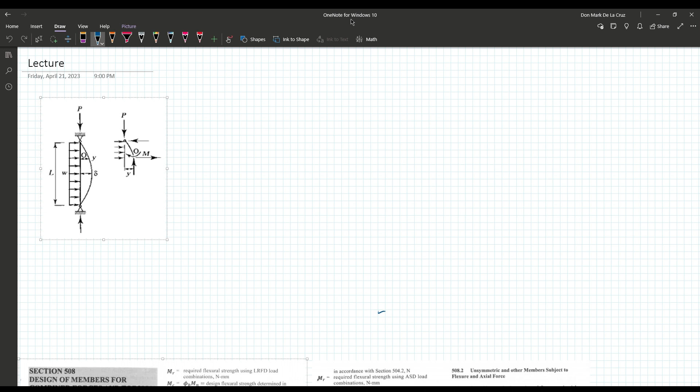In general, the relationship between the required and available strength may be expressed as required strength divided by available strength. So we have RS divided by AS, and this ratio of RS and AS, or the required strength and available strength, should be less than or equal to 1.0 in order to say that our loading is safe.

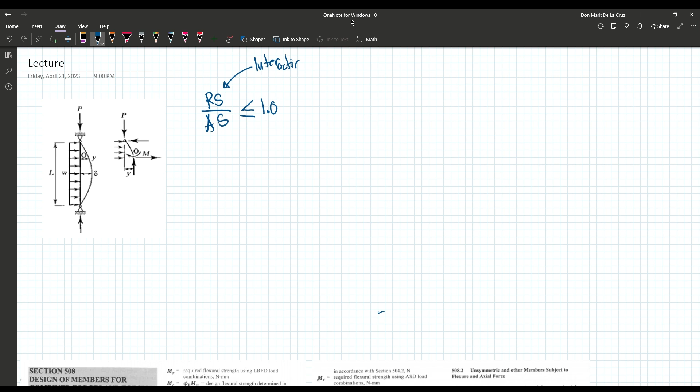And the value or the ratio of RS and AS is called the interaction value. This is called the interaction value, and it should be less than or equal to 1.0 in order to say that the relationship between our required and available strength is acceptable or adequate to support our given loadings.

And considering that we have a compressive force, our compression member will be subjected to a required strength, which is PU, and it also has a capability, our available strength, which is phi PN. This is for LRFD.

And the ratio of the two, PU, which is the required strength, and our phi PN, which is the available strength, must be less than or equal to 1.0. And if we have ASD, our PA divided by PN over omega must be less than or equal to 1.0 in order to say that this is adequate.

Or in general terms, this can be rewritten as the required compressive force divided by our available compressive force, and that should be equal to or less than 1.0. Similarly, if we have a member subjected to bending, we will have MR over MC, which must also be less than or equal to 1.0.

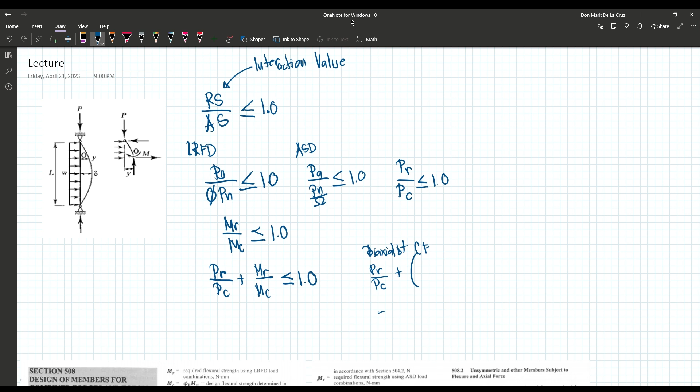And with this, considering that we will have biaxial bending, the moment can be divided into two parts. For biaxial bending plus a compressive force, our equation will become PR over PC plus the sum of MRX over MCX plus MRY over MCY, and this should be less than or equal to 1.0.

The subscript denotes that the bending is about the x-axis for this one, and for this one is about the y-axis. And from this concept, the codes stated in our NSCP were derived or formalized.

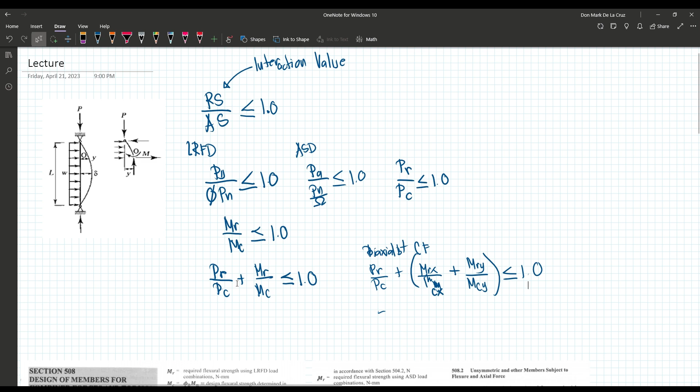Let's go down. Considering that we have doubly and singly symmetric members subjected to axial flexure, the interaction of the flexure and compression in doubly symmetric members and singly symmetric members, for which 0.1 is less than or equal to IYC over IY, which should be less than or equal to 0.9, that are constrained to bend about the geometric axis x and/or y shall be limited by equations 508.1-1A and 508.1-1B.

Where IYC is the moment of inertia about the y-axis referred to as the compression flange, in mm raised to 4. And if we compare this from the concept presented earlier, this is our interaction value formula.

Given that PR over PC is greater than or equal to 0.2, we simply multiply the moment part by 8 over 9, considering that the contribution of the compressive force is larger compared to our moment.

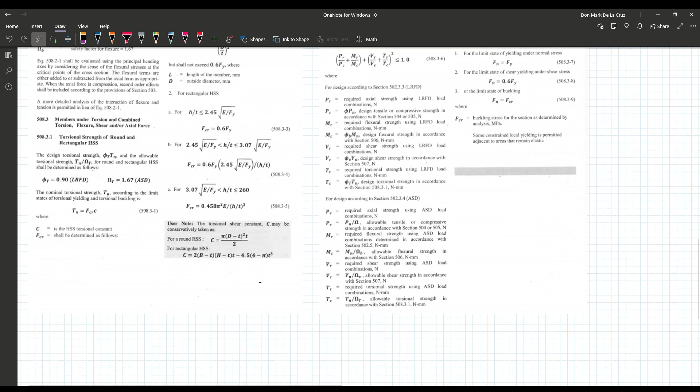We also have provisions for doubly symmetric members in single axis flexure and compression, and for unsymmetric and other members subjected to flexure and axial force. There are also provisions for members under torsion and combined torsion, flexure, shear, and axial force, among others. For now, we'll focus on the combination of flexure and compression.

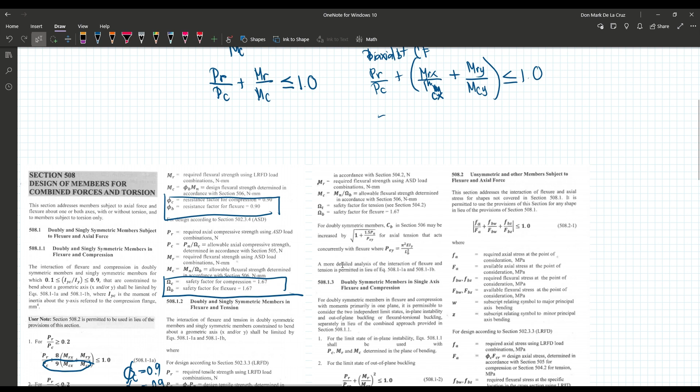And with this, we will have our sample problem in a separate video.

Good day everyone. In this video, we will have our example problem for flexure and axial load, the combination of flexure and axial load. We have a column shown in the figure which is pin connected at both ends and subjected to horizontal and vertical loads.

We are required to determine the adequacy of this member, considering that there is no local instability. Given that the length of the column is 6 meters, our compressive dead load is 150 kN, compressive live load is 420 kN, while our horizontal dead load, which acts at the midpoint of our beam and will cause bending moment, is 30 kN, and horizontal live load is 50 kN.

The steel is made of A992 steel with Fy of 345 MPa and Fu of 448 MPa. Given the section properties of our W250 by 80, its dimensions, and the section properties.

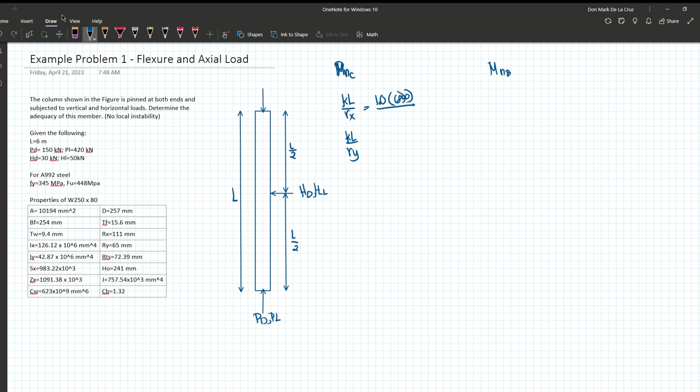We can compute for our slenderness ratio about its x-axis as 54.054. While for our Ry, our K is also 1.0, and L is 6,000 divided by Ry, which is 65. This will give us our slenderness ratio of 92.308.

Comparing these two to determine our critical slenderness ratio, that's the maximum between the two, and our critical slenderness ratio is 92.308. Now, to know what type of buckling will occur, we need to compare the critical slenderness ratio to our limiting slenderness ratio, which is 4.71 times the square root of E over Fy, where E is 200,000 MPa and Fy is 345 as stated in our problem. We can compute our limiting slenderness ratio as 113.40.

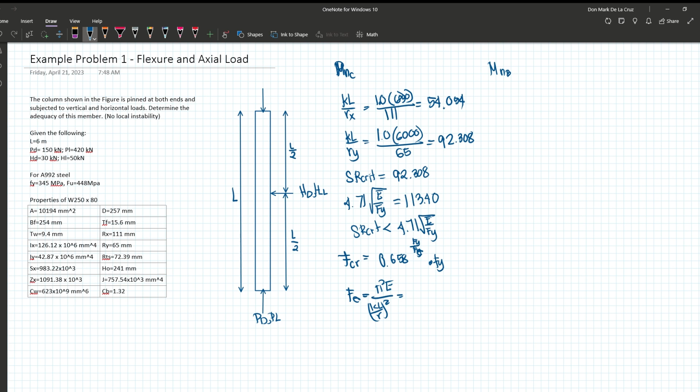Now, the problem is that we don't have a value of Fe yet. So let's compute for Fe, and its formula is pi squared E over KL over R squared, and that's pi squared times 200,000 divided by KL over R, which is 92.308, then squared, and we will get Fe as...

231.66 MPa. Then with this Fe, we can now compute for FCR. So our FCR equals 0.658 times Fy, 345, divided by 231.66, times Fy, 345. And our FCR is 184.97 MPa.

But we're not done yet since we are finding our nominal compressive force, and that's Pn equals FCR times Ag. And our Pn is 1885.6 kilonewton, which we will be using later on.

Now that we're done with the compressive part, let's move to the moment. Since our moment will only act on our major axis, our Mny will automatically be equal to 0, so what we need is just Mnx.

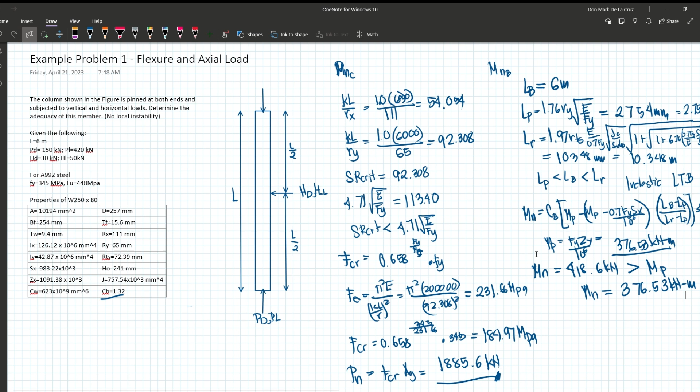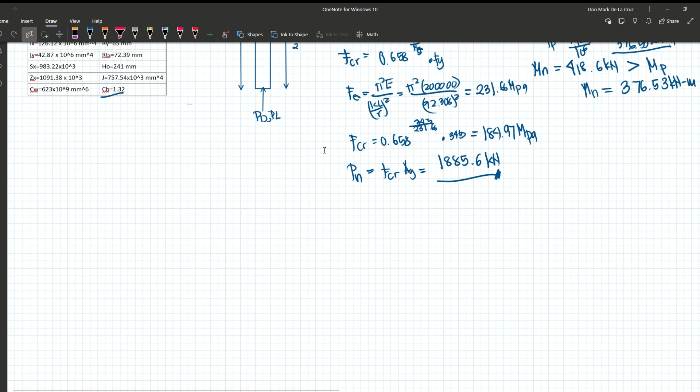Now that we have computed already the value of our MN and MP, or MN and PN rather, we can now determine the adequacy of our beam columns. And to determine the adequacy of our beam columns, we'll be utilizing the provision for our NSCP, specifically this one.

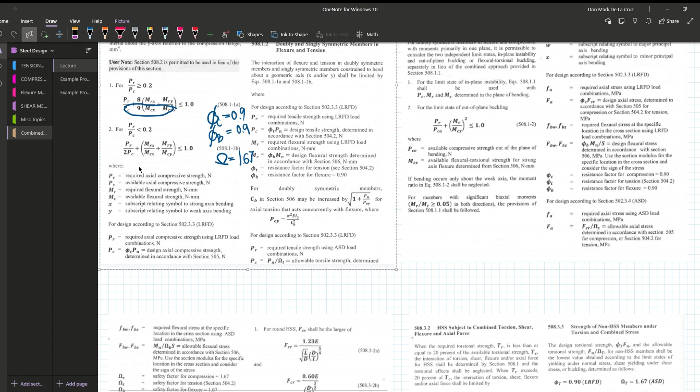We will use this one, and based on this, kailangan muna nating malaman or makuha yung ratio ng PR over PC to choose kung case 1 or case 2 yung gagamitin natin.

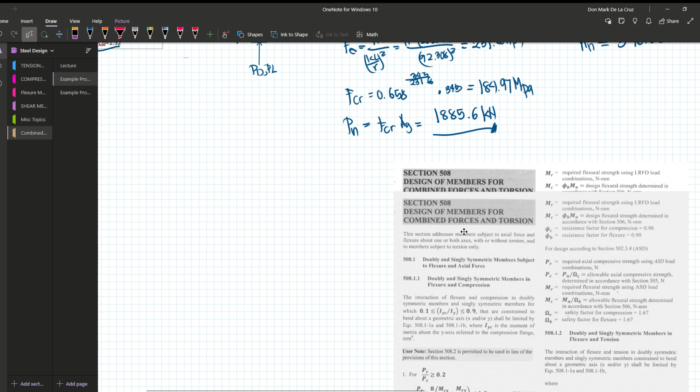Pero hindi pa pala natin nako-compute si ating tawag dito, available strength and si required strength natin. Let's have first using LRFD. Compute natin yung ating

available strength. Bali, meron tayong PC or magiging siyang si PU max equal siya sa Phi times PN, and that's 0.9 times 1885.6 kilonewton, and ang PU max natin ay

1697.04 kilonewton, while our MU max would be MN over times Phi. At ang Phi natin is 0.9 as well times 376.53, and this will give us the value of our MU max as 338.88 kilonewton. But this is just the denominator of our equation.

Kailangan natin pang makuha yung ating mga available, mga required strength. At let's have first sa ating compressive force, that's PU. Ang ating load combination ay 1.2 of dead load plus 1.6 of live load. 1.2, ang dead load natin is 150 plus 1.6 of live load na 420. And this will give us 852 kilonewton.

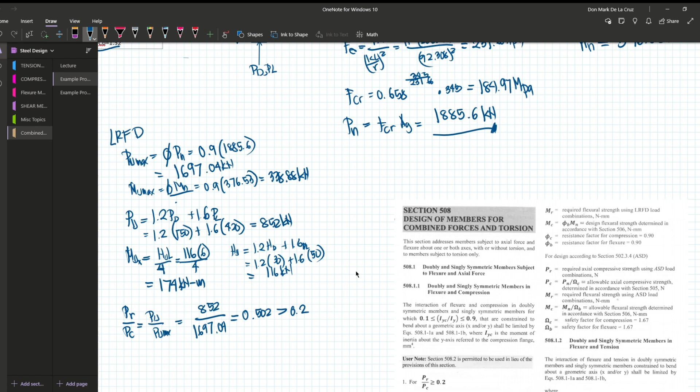And that's why we will use our first case of doubly and singly symmetric members in flexure and compression. And the formula is PR, that will be PU divided by PU max plus 8 over 9 of MUX over MU max X plus MUY over MU max Y, and this interaction value must be

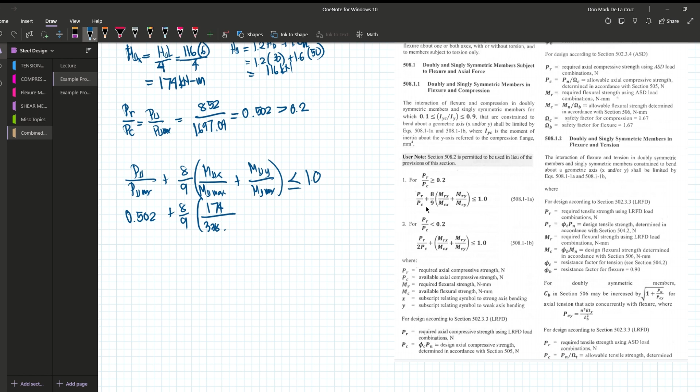less than or equal sa 1.0 in order to say that we have an adequate beam columns. And PU over PU max was already computed. That's 0.502 plus 8 over 9 of MUX. That's 174 divided by MU max, which is 338.88. Ang MUY natin as well as MU max is equal sa 0 since wala tayong force that will cause bending about the y-axis.

And now let's solve for this one. And there should be less than sa 1.0 at ang compute natin ay 0.958, and this interaction value is less than 1.0, therefore yung ating beam column is adequate.

And now let's consider naman si ASD. And for ASD, ang ating omega is equal to 1.67 for both LRFD and for both compression and bending. But let's start in determining PA. That's PD plus PL, or simply 150 plus 420 equal siya sa 570 kilonewton. While yung HA natin ay HD plus HL equal siya sa 30 plus 50, or simply 80 kilonewton.

And with this HA, we will compute for our MAX. And that's HA times L over 4. Bali, apply lang si theory of structure doon, ano? That's 80 times 6 divided by 4. And we will get our MA max as 120

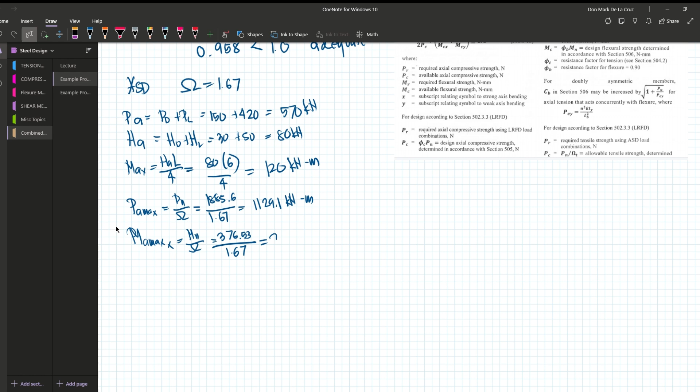225.47 kilonewton meters. And with this, pwede na tayong pumili kung anong case yung gagamitin natin by dividing our PA by PA max. And ang PA natin is 570 at ang PA max natin ay 1129.1. And makukompute natin is 0.505, which is greater than sa 0.2.

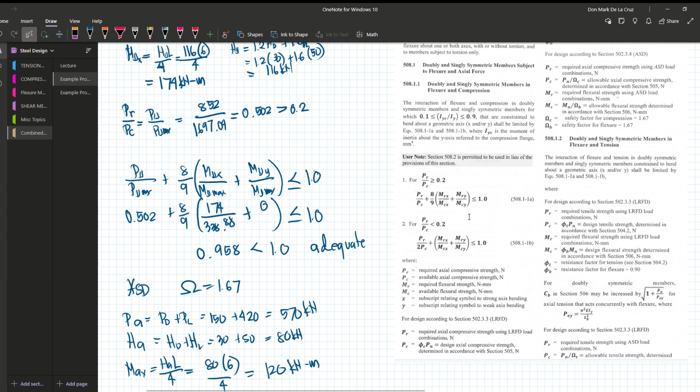So, governing si axial load. Kaya ang ating equation would be this one: PA over PA max plus 8 over 9 times MAX over MA max x plus MAY over MA max y, which should be less than or equal sa 1.0.

Earlier, na-compute na natin si PA over PA max as 0.505. Then i-add na lang natin si moment part. Ang MAX ay 120, ang MA max x ay 225.47. Then ang MAY at MA max Y would be equal sa 0 since there are no forces that will cause bending about y-axis.

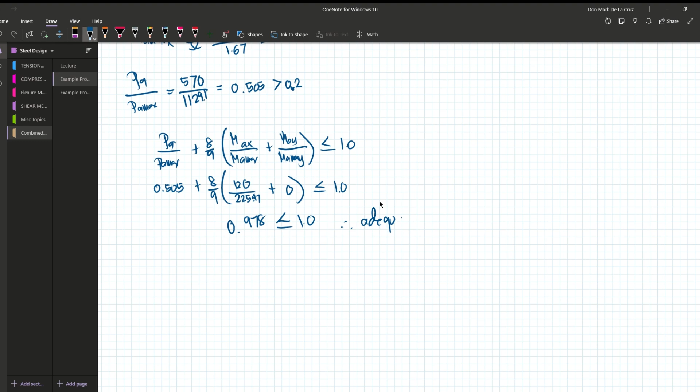Makukompute natin ito at yung ating interaction value as 0.978, which is less than 1.0. So we can conclude that adequate yung ating beam columns to support our given loads.

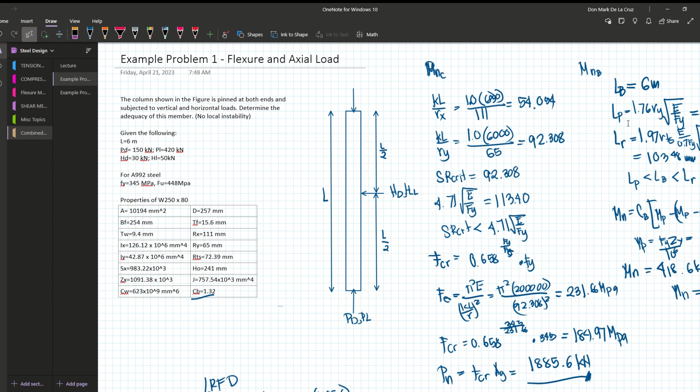And thank you for watching. I hope that you have learned something about our flexure and axial loads. This will be our only example problem for this topic, but we have a sample problem for purlins that is somehow related sa ating concept ng flexure and axial. But for purlins, that is only biaxial bending or biaxial flexure force. Thank you for watching.

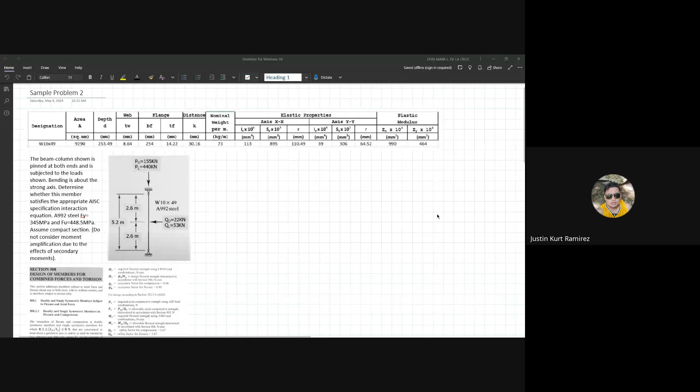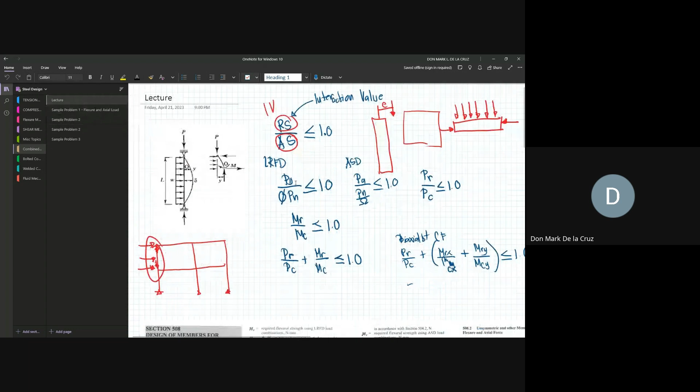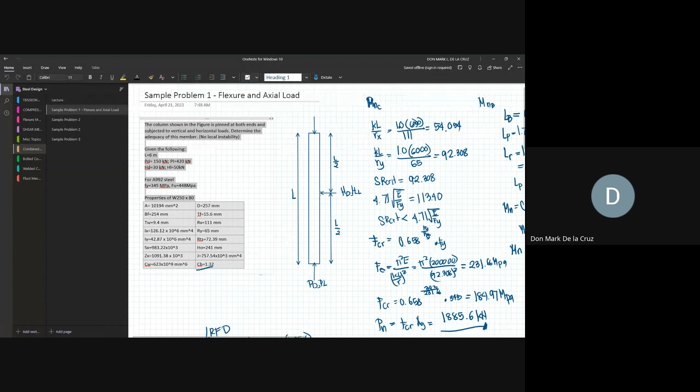For today, what we're going to have is combined forces that may be axial, compression and tension, with the effect of flexure. Bali, ito yung concept na gagamitin natin. Meron tayong recorded lecture na na-discuss na yan sa video, hopefully napanood na to. And we have a sample problem that was posted last time, which pertains to axial compression with an applied concentrated load that acts transverse to our column and has an effect of flexure dito sa column na to.

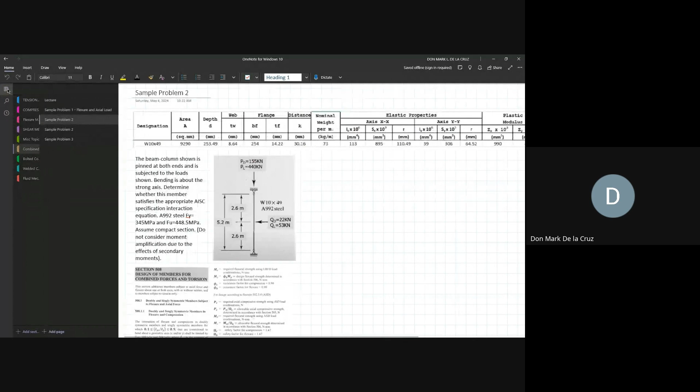And with that, magiging or nag-act yung ating column also as a beam. Meron tayo ditong second sample problem, basically katulad lang din naman siya nung previous sample problem number 1 natin. We'll just discuss this synchronously. Bali, for this one, we have this beam column. Primarily, column siya, pero this will also serve as a beam dahil nga dito sa concentrated load na to. Dahil sa concentrated load na ito, magkakaroon ng flexure o more moment within our column. That's why we have the term called beam column.

Yung beam column natin is pinned at both ends and is subjected to the shown load combination. Meron tayong dead load, then live load na compressive force. And we also have this concentrated dead load and live load that acts at the midspan of our column. Then, bending is about the strong axis. And we know naman na meron tayong strong axis bending and weak axis bending.

But for our problem, yung bending natin will just occur on the strong axis. And usually, the strong axis is yung merong mas mataas na moment of inertia. Considering that this is a W section, yung strong axis niya is the x-axis natin, kasi mas greater yung moment of inertia niya doon. Try lang natin magsulat: greater yung moment of inertia at the x-axis compared to the y-axis. Then dito, kailangan nating ma-determine whether this member satisfies the appropriate AISC specification interaction equation.

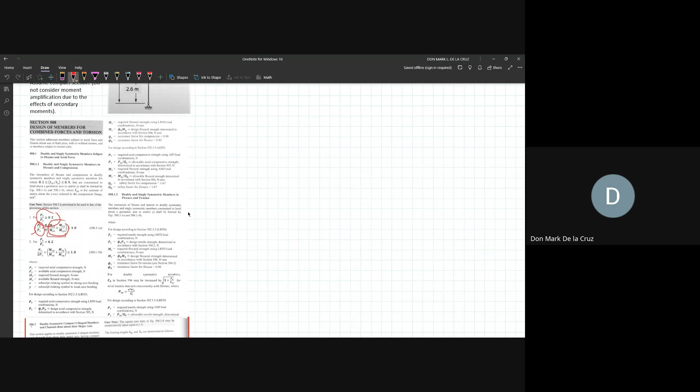So with the given properties shown here, let's start solving this problem. Our goal is just to get this value, whether it is less than 1.0 or greater than that. Let me delete this first.

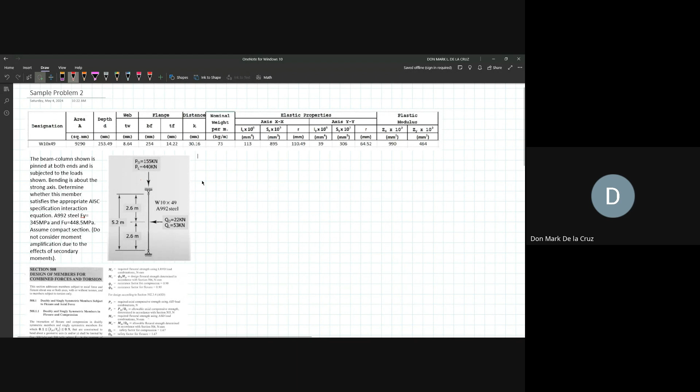So for our first step, what do we need to do first? For the first step, we must compare PR over PC to 0.2. We need to get the relationship of PR over PC to 0.2, because from this we'll know if we're going to use equation 1 or equation 2.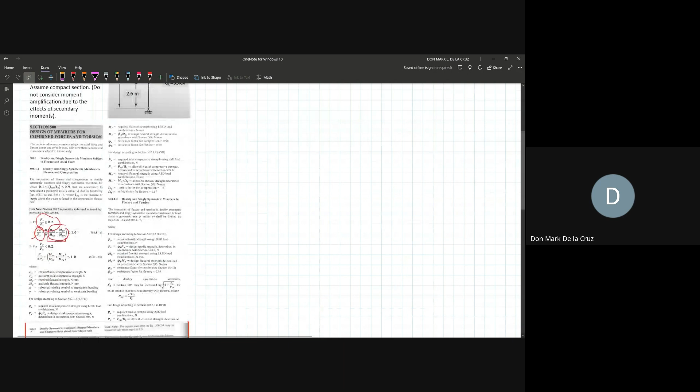So what is PR? Based on the definition here, PR is the required axial compressive force. So how do we compute for the required compressive force? Take note that we have two design philosophies.

To keep our calculation simple, we'll just utilize LRFD. We'll resolve this problem by applying ASD after we finish.

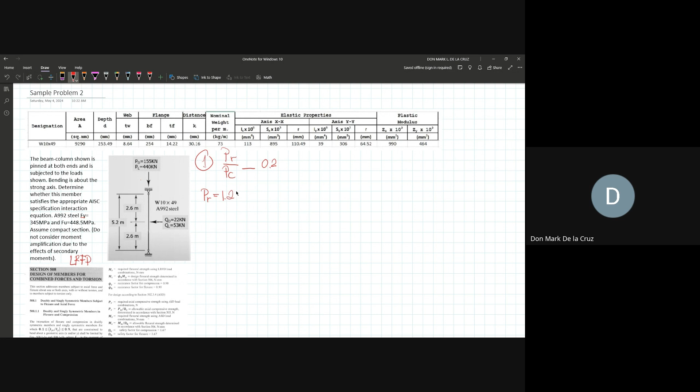So if we're going to use LRFD, to compute for PR we're going to use its load combination factors: 1.2 of dead load plus 1.6 of live load. If it's stated that this is already a factored load, we don't need to apply the 1.2 and 1.6 anymore, but we weren't told if this is factored or unfactored load, so our assumption is that this is unfactored load.

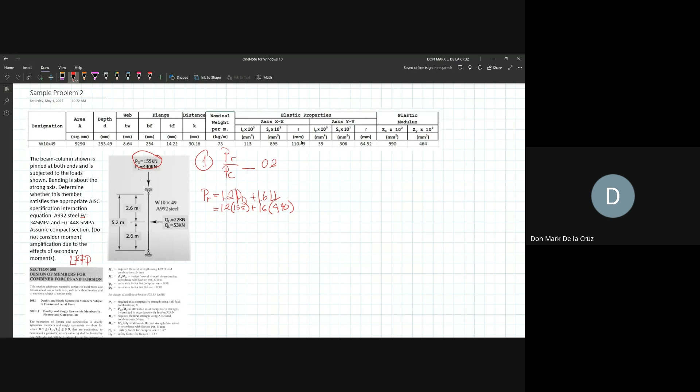So 1.2 times PD, which is 155, plus 1.6 times the live load, which is 440. Let's get the sum: 1.2 times 155 plus 1.6 times 440. So our PR we compute as 890.

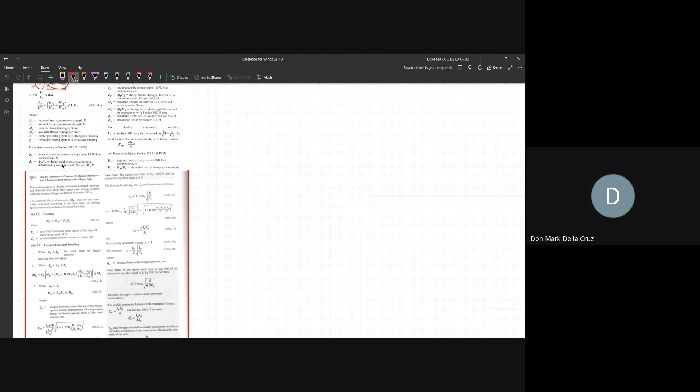After this, we'll solve for PC. What is our PC? PC is defined as the available axial compressive strength. So if we're going to compute for the available compressive strength, it's here too. Considering LRFD, that's basically phi times PN. So what's our phi? Knowing that this is for compression, our phi is 0.9.

But how are we going to compute for our PN? For PN, we're going back to our topic on compression members, and we're going to solve PN based on the code for compression members. Where is it? It's not here. Let's recall how we solved for PN.

For compression members, basically the first step is determining the width-to-thickness ratio, to know if we need Q or not. But it was already stated that we have a compact section, so let's skip that. Then the next step is we need to know our slenderness ratio, SRX and SRY. And from SRX and SRY, we need to get S-crit. So, what is our SRX?

Bali for our SRX, kailangan natin ng formula, KL over R, that is for X. Then KL over R din for our Y-axis. Basically, ang sinabi sa problem natin that we have both pin ends, so pag meron tayong both pin ends, ibig sabihin ang K natin is equal to 1.0. Ganon din sa Y-axis kasi wala namang binanggit na other support.

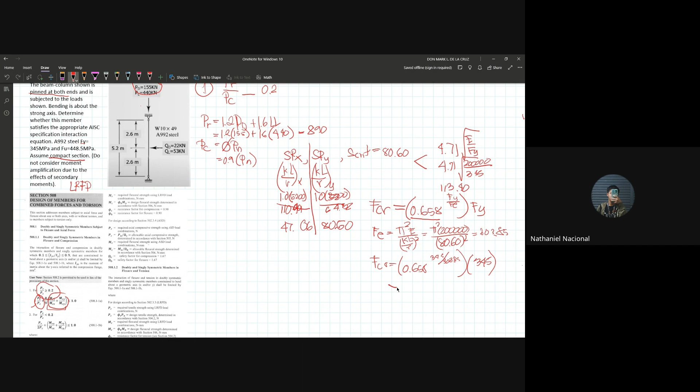Meron na tayong Fe, substitute na lang natin sa FCR. It is 0.658, Fy is 345, divided by 303.85, times 345. So ilan to? 214.49... 214.50. That is MPa.

Then lastly, solve na tayo for PN. So PN is just FCR times AG. FCR ay 214.50, while our AG, ang AG sabi sa problem ay 9,290. So that will give us ang answer natin, na makukuha sa calculator ay naka-Newton, but divided by 10 raised to 3 para yung ating sagot ay naka-kilonewton na: 1992.71.

Kilonewton, tama ba? May decimal kasi ginamit ko. So 1992.71 kilonewton. Then after that, balik na tayo dito sa pag-compute ng PC dahil kailangan natin makuha yan. That's 0.9 times 1992.71. So our PC is 1793.43 kilonewton.

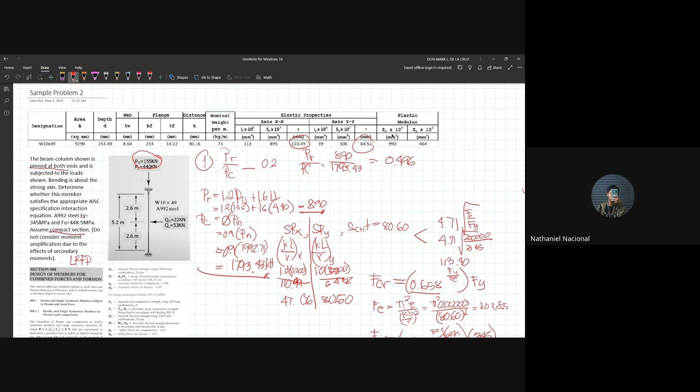Then to check for the ratio of PR over PC, so PR is 890 divided by 1793.43. So ano yung sagot? Dito ay 0.496, tama ba? Tama, sir. So comparing to 0.2, which is greater, PR over PC is greater than 0.2.

Since PR over PC is greater than 0.2, which formula are we going to use? We're going to use equation number 1: PR over PC plus 8 over 9 times MRX over MCX plus MRY over MCY, greater than, less than, or equal dapat siya sa 1.0. May value na tayo ng PR over PC kasi na-compute na natin yan kanina, so lagay na lang natin yung value dito, that is 0.496.

So tapos na tayo sa compression part ng ating interaction value. So move naman tayo sa flexure part.

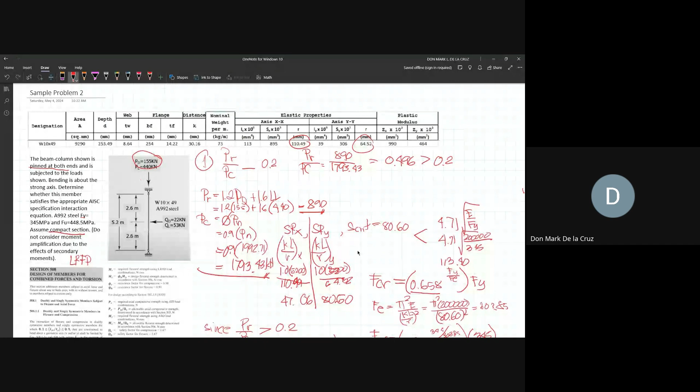Flexure ang ia-analyze natin. But sabi sa problem, ang bending natin ay nasa strong axis lamang, bali sa x-axis. So walang bending na sinabi for our y-axis. So ito ay magiging 0 lang, itong term na to equal na sa 0.

Pero kapag sinabi na merong bending at the y-axis as well as sa x-axis, mas mahaba yung calculations natin. Pero mas madali yung solution natin ngayon dahil wala tayong bending at the y-axis.

So solve muna tayo for MRX. To solve for MRX, kailangan lang natin i-analyze yung ating column as a beam. Redraw lang natin, assuming that this is our column na naging beam na siya, may simple supports tayo dito. Yung lateral support ay nandun lang sa end kasi wala nang binanggit na additional lateral support. Tapos meron tayong concentrated load dito sa gitna.

So ilan yung concentrated load natin? Hindi lang tayo basta mag-a-add dito kasi gagamitan pa natin ng moment, kasi nga moment yung kailangan. Doon sa una, compression, wala na tayong ibang ginawa dahil compressive force lang yung nag-uusapan dyan.

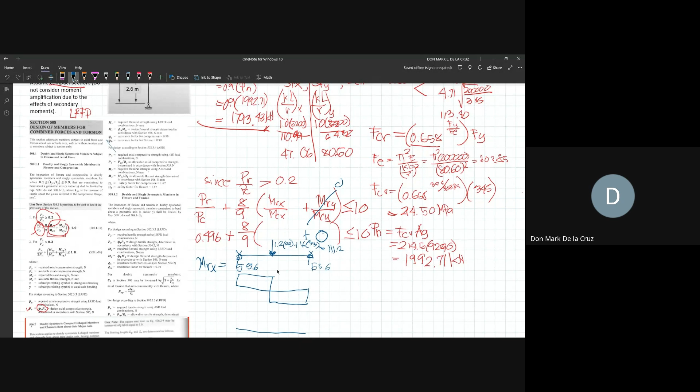Then for the moment diagram naman, ano yung moment diagram nito? Ito siya, then kunin lang yung area nito. That is 55.6 times, ilan nga, 2.6. So that will give us, triangular na yan, mas mababa dito. The maximum moment natin is equal to 144.56.

Nasundan yung nagawa. Kailangan lang i-perform ito, shear and moment diagram. Hindi ko naman kailangan ituro kung paano yan gawin kasi dapat ito ay natutunan na kay Sir Dayahan.

Or in other way, pwede rin naman tayo gumamit ng derived formula. Yung MUX natin, or the maximum moment, considering that we have a simple support and a concentrated load at its midspan, that's simply equal to the concentrated load multiplied by the length of the beam divided by 4. So that will be 111.2, sorry, sira yung aking pad, times 5, ilan nga yung length ng beam natin? 5.2, divided by 4. So 111.2 times 5.2 divided by 4 will also give us the same answer.

Ito yung sobra pala ng 4. That's 144.56. Yan din dapat yung natin, 55.6 times 2.6, tama. We have 144.56 na MRX. Ito yung MRX natin.

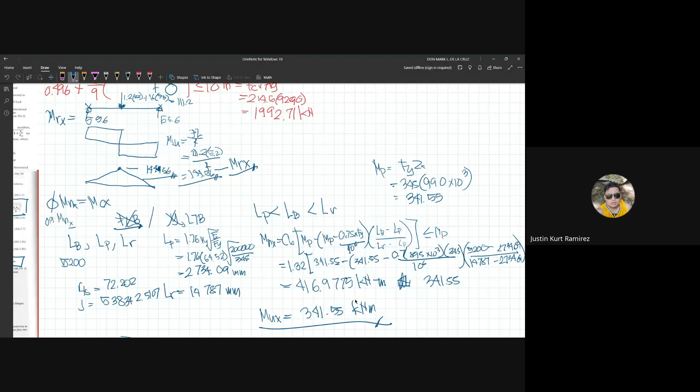Nasundan yun? Bakit ito yung magiging value natin? Yes po, dahil sobra yung MNX kesa sa MP, ano kaya yung gagamitin? Verify ko lang ulit kung tama.

Saglit lang ah. Yan, tama talaga.

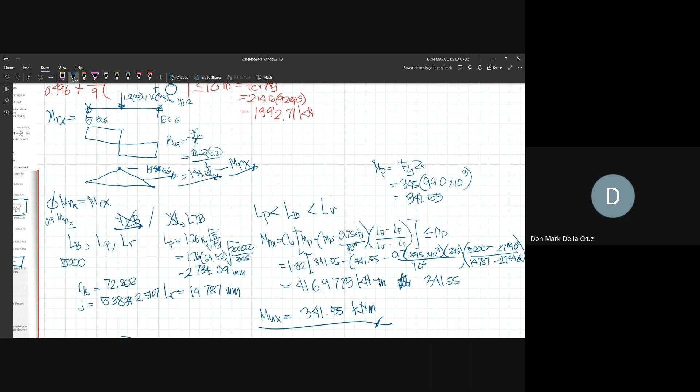So this is our MNX. Para i-compute lang natin ang MC, so that's phi MNX, that's 0.9 times 341.55. 341.55 times 0.90 gives us 307.395 kilonewton meter.

So basically, meron na tayong PR over PC, check na yan, plus 8 over 9, then MRX over MCX, may value na tayo, then this one, MRY over MCY. This term is equal to 0 plus PR over PC.

Na-compute natin siya as 0.496, plus 8 over 9. Ang MR na na-compute kanina ay 144.56. Then ang MC naman natin is 307.395.

So let's get the value ng interaction value natin, that's IV. IV pala ang tawag dyan, the interaction value. Bali, 144.56 divided by 307.395, times natin sa 8/9, then i-add sa 0.496.

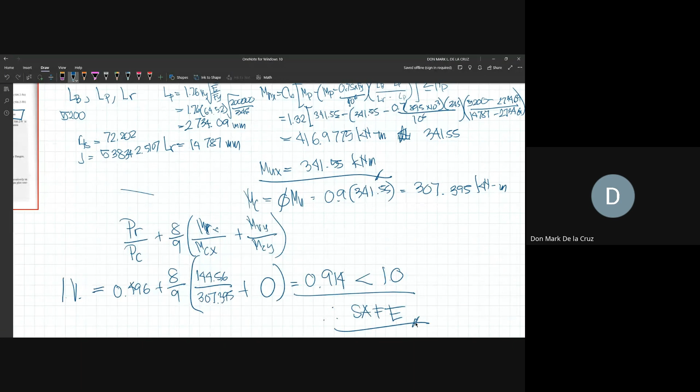Nasundan? Kung ano yung nagagawa natin? Opo, sir.

May question? Do you have any question po?

Bali hindi natin masasagutan itong interaction value kung hindi tayo gamay dun sa ating column pati flexure member, kasi doon magmumula yung mga gagamitin natin na value para sa interaction values natin.

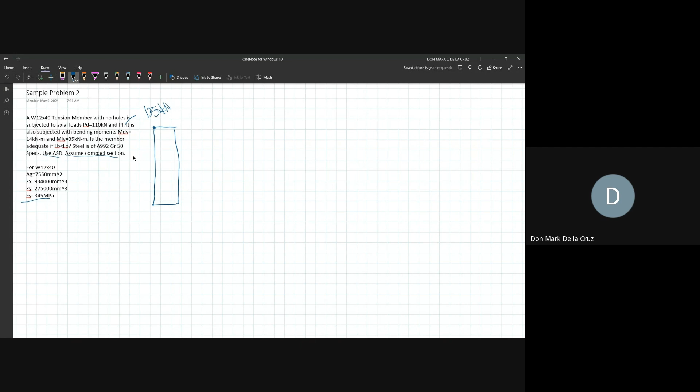For this one, we're using a wide flange section acting as a tension member with no holes. Aside from the axial load, this tension member also experiences a moment about the y-axis, so it's y-axis bending that we have.

This is our I-section. We have a tensile force here of 110 plus 135. Then we have a moment here at the y-axis of 14 plus 35. At the x-axis, our value is 0.

Since we're using ASD, no load combination will be applied, so we just add the applied load and applied moment. For tension, that's simply 110 plus 135, which is 245. This 245 will automatically be our PR.

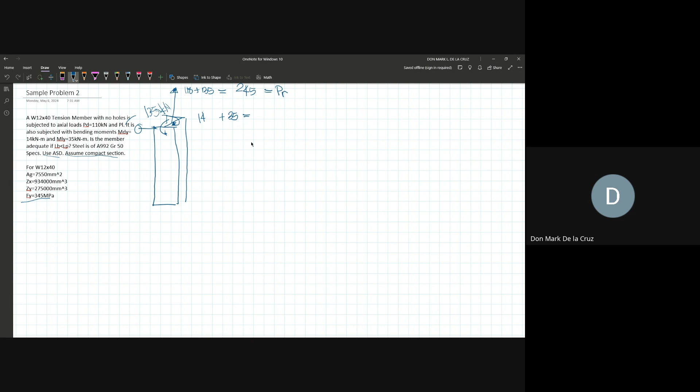This is our y-axis bending: 14 plus 35, that is 49. This 49 is our MRY. Then our MRX is equal to 0.

We still need to get PR over PC to determine which equation to use, and compare it to 0.2. We have the value for PR, that is 245, but we don't have the value for PC. Where do we get PC?

Since this is a tension member, we'll use the concept for determining PC for tension members. This will be Phi-Pn—actually no, since we're using ASD, that will be Pn over omega.

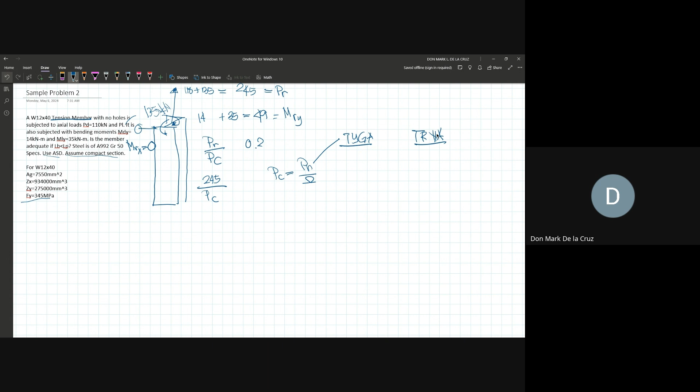Our Pn can be based on tensile yielding on gross area or tensile rupture on net area. But which one should we use here—the yielding one or the rupture one? Or do we use both?

Hello po. Which should we use—tensile rupture or tensile yielding? Hindi pa ba kayo? Sir, wala po idea ko anong gagamitin.

Okay, it was stated that we don't have holes—no holes, so there is no hole. So the area we need to consider is the gross area, because for net area, we'd consider that there are holes. So we're going to use tensile yielding on the gross area.

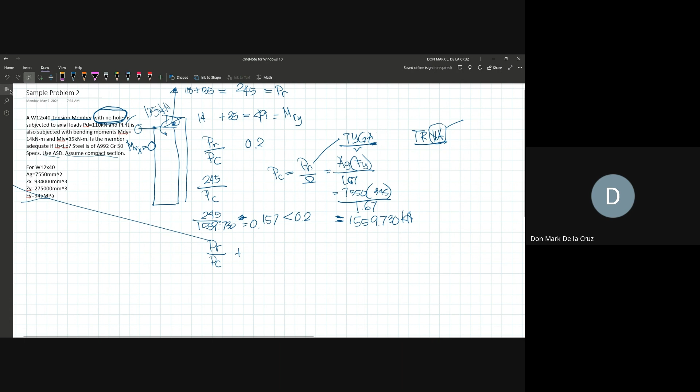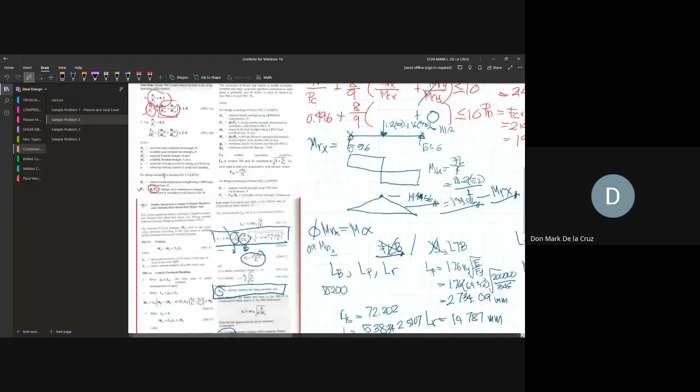Since PR over PC is less than 0.2, we are going to use the second formula. That will be PR over PC plus... what's the formula? Let's check the code. 8/9? No, not 8/9. This is our second formula.

PR over 2PC plus MRX over MCX plus MRY over MCY, used when PR over PC is less than 0.2. That is PR over 2PC. So that's what we'll use, so there's a 2 here.

Then this will be MRX over MCX plus MRY over MCY. But MRX is equal to 0, so this term becomes zero. We're just left with MRY over MCY.

So after that, we already have value for PR over PC, pati itong MRY natin. MCY na lang yung concern natin para makuha natin yung interaction value, which we compare to 1.0. But what is our MCY? Bali, MCY is minor axis bending.

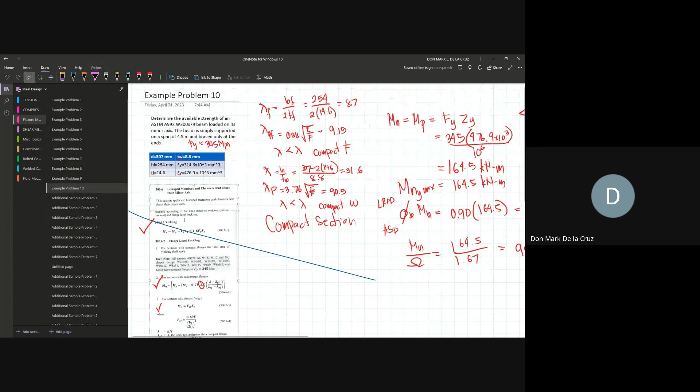So to solve for our MCY, our formula is simply Fy Zy, but that should not exceed 1.6 Fy Sy. Zy pala to, kasi minor axis bending nga. So MCY is equal to 345 times Zy, that's 934,000.

Ay Sir, ZY ang po gamitin. Okay, ZY. Mali ito, saglit. ZY ang gamitin natin. Kasi ganito na lang: 345 times 275000. So ilan yan? 345 times 275000, this should be...

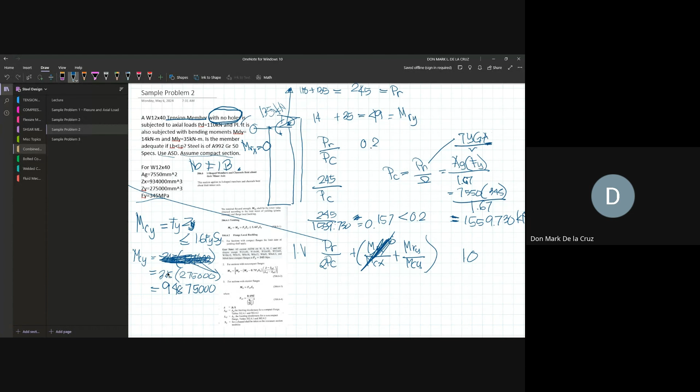94,875,000 divided by 10 raised to 6, para maging answer natin ay naka kilonewton-meter. This should be 94.875 kilonewton-meter.

But kailangan pa natin siyang i-verify if hindi to mag-exceed sa 1.6 Fy Sy. Kaso wala tayong value ng Sy na binigay, 345. Hanapan ko lang kung may value ng Sy. Ay, hindi pala given yun. Naka-English pala to. Hindi ko mahanap kung ano yung value ng ating Sy.

Pero kailangan ma-compare siya dito. But assuming that yung ating MCY will not exceed 1.6 Fy Sy, therefore this will be our - hindi pa siya MCY ano? Hindi pa siya MCY pala kasi ito ay dapat ay MNY pa lang, MNY.

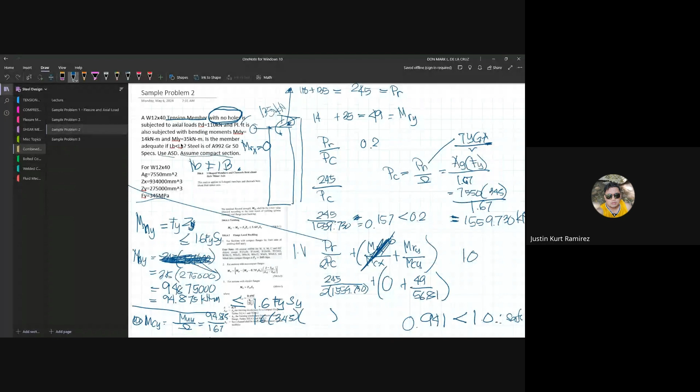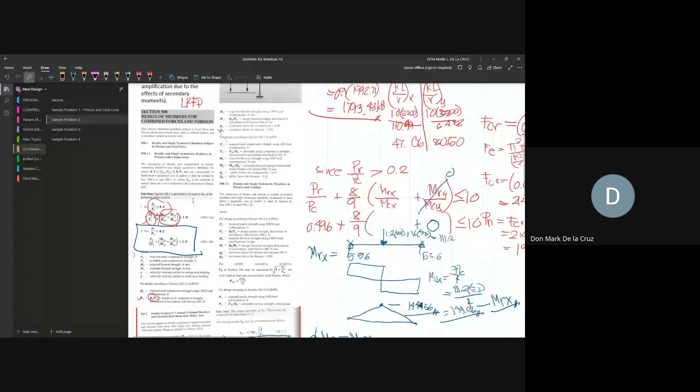Bali, ano lang yung bago dito sa topic na to? Yung bago lang dito sa ating natawag natin na combined forces and torsion or yung flexure natin is yung nakuha natin na values from compression and flexure member, pag nag-act siya simultaneously, kailangan yung ating interaction value o yung effect ng combination of forces natin ay laging less than sa 1.0. Yun lang naman. Pero yung previous knowledge natin ay utilize lang to solve for the interaction value.